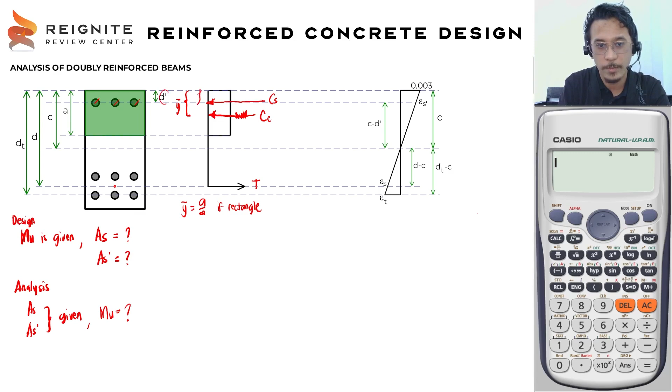And then this distance here, this is our D prime - the distance from extreme compression fiber to the centroid of compression reinforcement. Then here, same as discussed last time, the D and D sub T. The distance between CC and T is D minus Y bar, or for rectangular sections, D minus A over 2. And the distance between CS and the tension is D minus D prime.

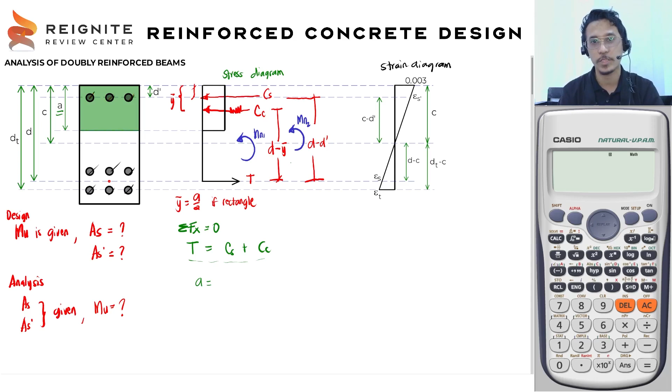So to analyze the beam, you can just get the summation of Fx in the stress diagram. Summation of Fx equals 0, so we have tension equals CS plus CC. Using this equation, you can get the value of A, which is the depth of the compression block from the extreme compression fiber, and then we can calculate the value of C.

By getting A over beta sub 1, C equals A over beta sub 1. Then the next step is to determine Fs prime and Fs, and check if our assumption is correct - since initially we assume that Fs and Fs prime yield. Then you also need to calculate the strain to check if it's under the tension control section, compression control section, or in the transition zone.

After analyzing and determining all those parameters, we can now calculate the value of Mn, or ultimate moment capacity, which comes from Mn1 plus Mn2. MN1 comes from the concrete and initial tension bars, and MN2 from the additional reinforcement in compression and tension side.

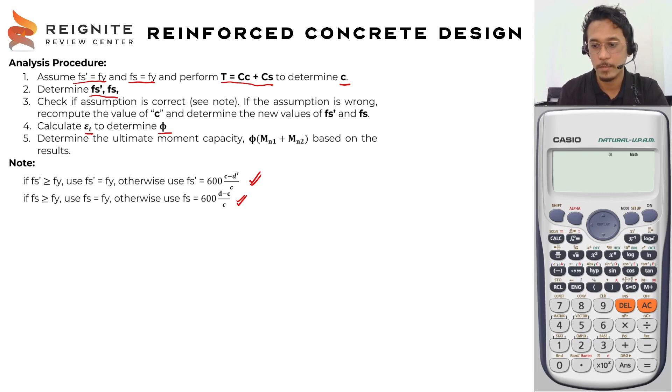Okay, so let's start this problem. Sabi sa problem, a simply supported rectangular beam has the following properties. So for the length, meron tayong 6 meters. Sa base naman ng ating width ng beam, we have 300. The effective depth of the beam is 500 mm, and yung D prime natin, o yung location nung centroid ng ating compression steel reinforcement, ay 60 from the extreme compression fiber.

Okay, so D prime yung ginagamit natin doon na symbol. So D prime is 60 mm. Yung D naman natin, yun yung distance mula sa extreme compression fiber to the centroid of tension reinforcement, which is 500. Now we have here AS natin na 25 mm diameter bars.

So walang binanggit kung ilang layer yan, so we need to assume na siya ay isang layer lang. Okay, so AS prime, 4 na 20 mm diameter bars. So we have here also yung 28-day compressive strength ng concrete natin, which is 28 megapascals, and yung steel strength natin o yung yield strength ng steel ay 276 megapascals.

So sabi sa problem, calculate the following using NSCP 2015. So neglect, ito yung term na neglect. Nabanggit ko yan kanina, so neglect the displaced concrete. Okay, ayan. So for this problem, we are required to calculate the additional nominal moment capacity provided by the added reinforcements. Ibig sabihin yung additional reinforcement.

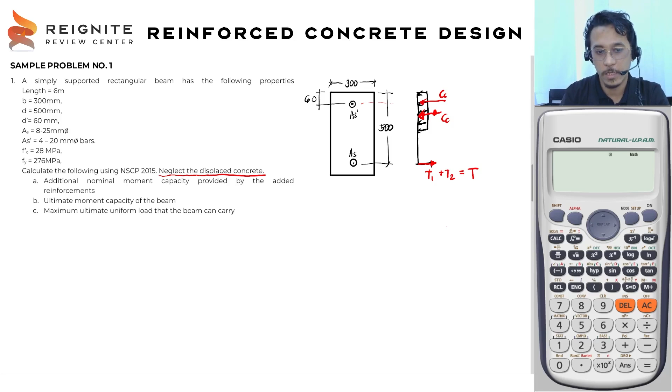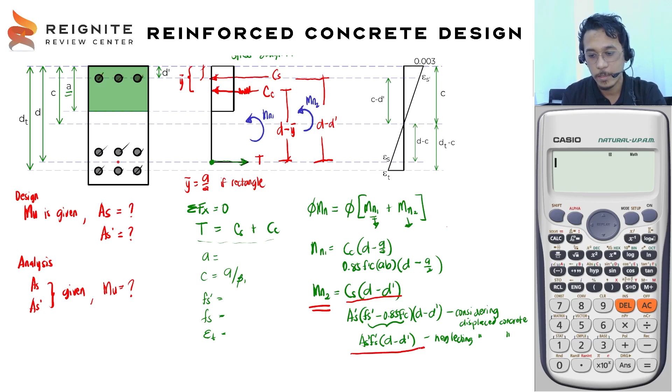Ano? So ang tinutukoy dun, class, na additional nominal moment capacity ay yung ating diniscuss kanina dito, which is yung ating Mn2, which is equal to CS times D minus D prime. So sabi sa problem, neglecting displaced concrete, ito yung kailangan nating formula later sa pagsosolve niyan. Pero before yan, we need to calculate first, o we need to follow the procedure first.

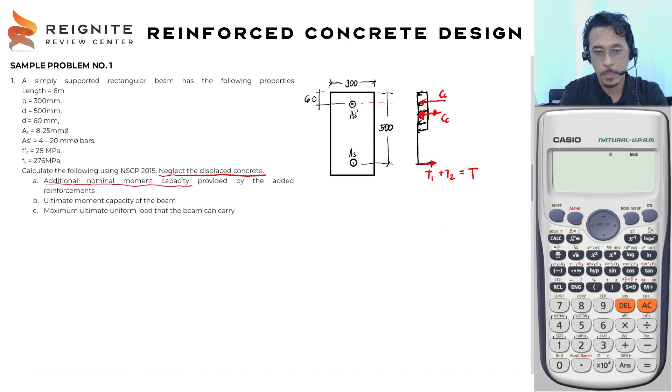So ang gagawin natin diyan, using statics lang, summation lang to ng Fx equals 0. So we have here CC plus CS equals tension. Diyan lang natin kukuhanin yung value ng A. So dito kasulat, copy ko lang to.

So yung ating CC, we need to assume muna. So lagay natin yung based dun sa kanina. Assume o assuming Fs ay equals sa Fy, and Fs prime ay equals sa Fy. So we need to prove na tama yung assumption natin, otherwise kailangan mong i-recalculate yung value ng C.

So for the concrete compressive force dito na CC, so we have here 0.85 F prime of C times yung area ng concrete natin, which is equal dun sa AB, since tayo ay nagtatry ng rectangle.

Plus yung ating CS, so AS prime times, ito ay neglecting yung displaced concrete, so dito dapat ay Fs prime. Then equate natin siya sa AS Fy. Okay, so yan yung ating gagawin na formula to calculate the value of A.

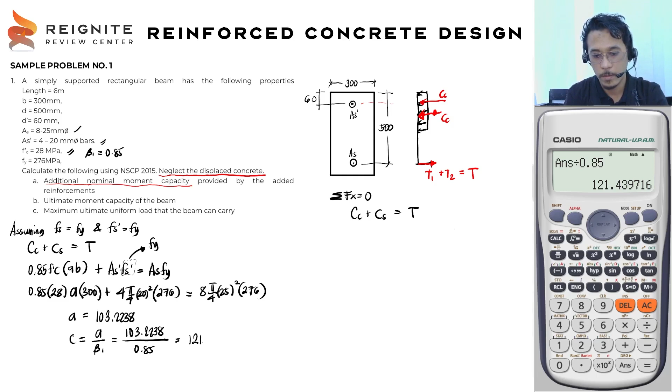Next, i-compute niyo na agad si Fs prime and Fs. Huwag niyo munang gagamitin or i-compute si strain kasi sa pahuli na siya. So gawin muna natin si Fs prime, galing dun sa strain formula natin, yun yung 600 times C minus D prime over C. So 600 times yung value ng C natin na 121, babawas natin yung D prime, which is itong 60, then divide natin siya dun sa C natin to get the value of Fs prime.

Okay, store ko lang to sa E. So we have here 303.5566. Check dito, yung Fy natin is 276, therefore ito ay mas malaki sa Fy natin. Therefore, assumption is correct.

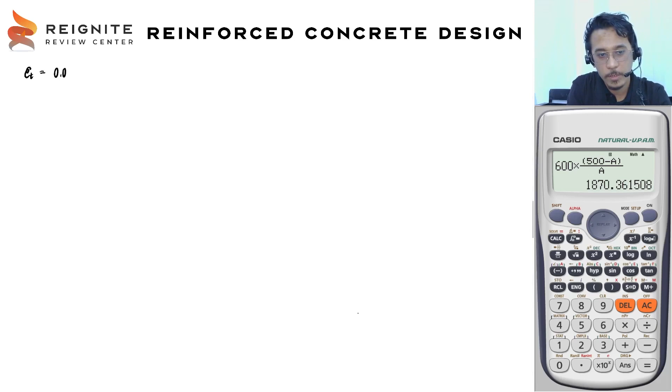So next step na natin dyan is to determine the strain, kasi kailangan natin ma-check kung siya ba ay tension controlled or not. So para ma-compute natin yung strain, we have here 0.003 times D sub T minus C, over C.

0.003, ita-times natin siya dun sa D sub T natin. So sa problem na 'to, wala tayong D sub T kasi hindi naman nabanggit kung ilang layer, so wala tayong pagkukuhanan ng D sub T. So yung D sub T na gagamitin natin ay equal na rin sa D dito sa problem na ito. So 500 minus yung C natin na 121, then divide natin siya sa 121.4397.

Yan, makukuha niyo na class yung epsilon sub T. Pag na-compute natin yan, check ko lang kung nandito. Ayan, so 0.003 times natin sa 500 minus yung sagot natin sa A, then divide natin sa A. Yung A yung ating value ng 121, check natin kung tama. Ayan, ito yun. So we have here 0.00935.

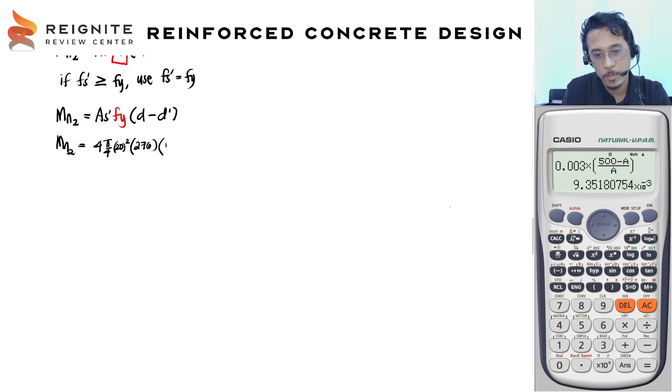So solve na natin yung Mn2. For the value of Mn2, As prime natin is, check natin yung value, kung ilang bakal to. 4 na 20, okay, so ito yung gagamitin natin. So 4 na 20 times yung Fy natin na 276. Ito yung ating As prime, ito yung ating Fy. Then ta-times natin siya sa D minus D prime, so 500 minus 60. Dito makukuha na natin yung value ng Mn2, and divide nyo ito sa 1 million.

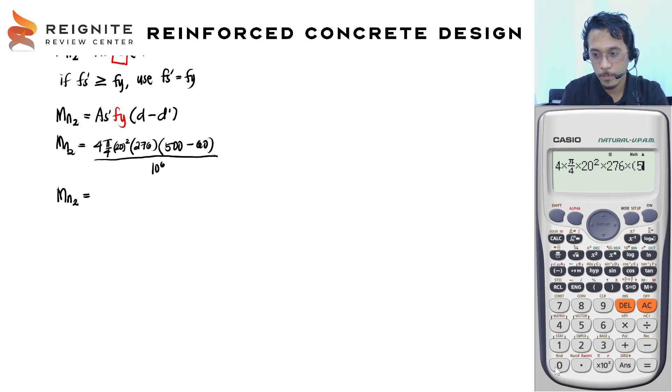So Mn2, 4 na 20. Dito makukuha nyo yung 152.606 kilonewton meter. Double check ko lang: As, then dito meron tayong Fy, then As prime pala yan. So 500 minus sa 60, then divide natin sa 1 times 10 to the 6. So ito yung sagot natin for letter A.

Now for the next problem, calculate the ultimate moment capacity of the beam. So we need to get the value of Mn1. Okay, so for Mn1,

ito yung sa 0.85 F prime of C, AB times sa D minus sa A over 2. So guys, take note, pag kuha kayo ng ultimate moment capacity, kailangan i-consider nyo na yung magma-moment kayo sa centroid ng reinforcement sa ilalim. Dito na kayo mag-moment, para makuha nyo yung Mn1 dyan, para consistent.

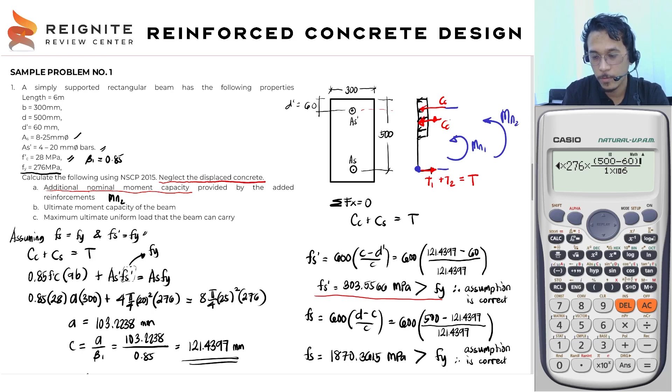Tapos yung moment dun sa kabila, yung Mn2, yung para dito tsaka dito. Okay, so yun yung pinakamadaling way, para common point yung ating papagkuhanan ng bending moment. Kasi pag ang ginawa nyo ay yung tension 2, baka ito ang gamitin nyo, so kukunin mo pa yung As2, so hassle yun.

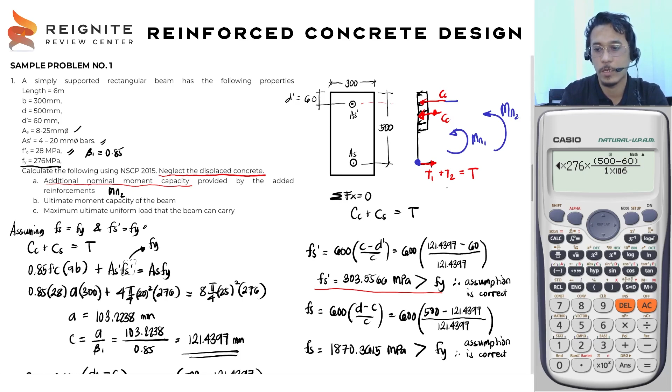Okay, so for this one, kunin lang natin dito yung values. So 0.85, F prime of C natin is 28. Then for our value of A, kunin ko lang siya dito, itong 103.2238, yan yung ating value ng A na na-compute kanina. Then for our B, ito ay 300. Then D natin is 500 minus yung ating 103.2238, divide natin siya sa 2.

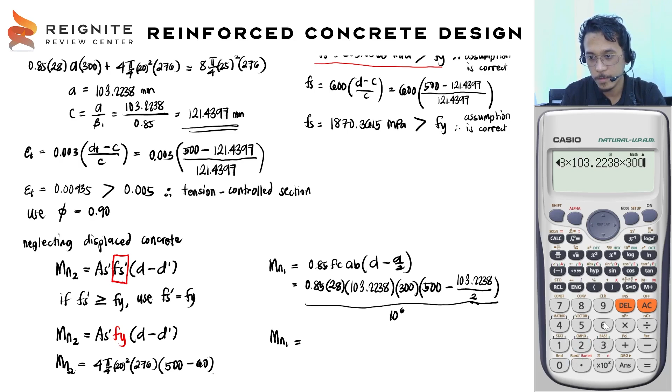Then all over 10 to the 6 na lang, or 1 million. So for our value of Mn1, palagay lang natin yan sa calculator. So 0.85 times 28, times natin sa 103.2238 times 300, times natin sa 500 minus sa 103.2238, divided by 2. Divide natin sa 1 million. Makukuha nyo na dito class yung 330.47. So Mn1 pa lang yan.

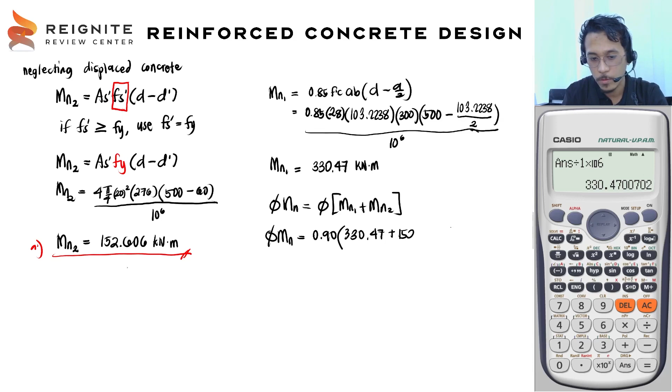Now to calculate the ultimate moment capacity, kailangan yung phi Mn, which is equal dun sa phi times sa Mn1 plus Mn2. So add lang natin. So phi Mn ay equal sa 0.9 times yung Mn1 natin kanina, 330.47, then add natin yung 152.606. Yan, so for our phi Mn, makukuha nyo dito class yung sagot natin.

So add ko lang tong 152.606, then times natin sa 0.9. So we have here 434.768 kilonewton meter, and yan na yung sagot natin for letter B.

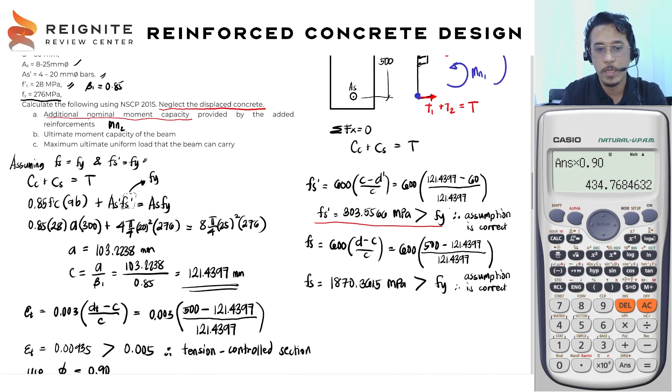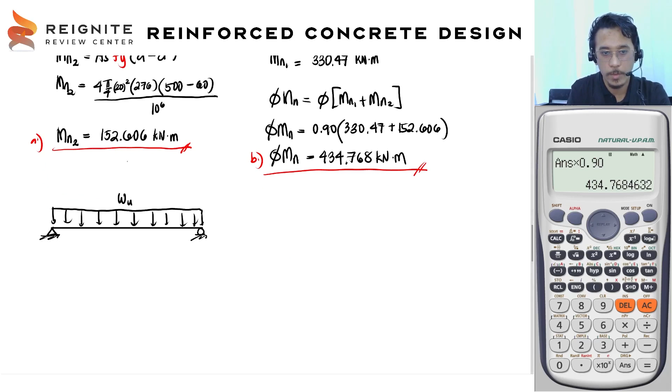Now for the last problem, ang tinatanong na dito is maximum ultimate uniform load that the beam can carry. Therefore, drawing natin yung beam para mas maintindihan nyo. So let's say ito yung beam natin, ito yung ating supports. Yung beam daw magdadala daw ng uniform load, at gusto natin makuha yung maximum na uniform load na kaya niyang dalhin, maximum ultimate uniform load. So para malaman natin yon, you need to determine first ano yung maximum bending moment dito sa beam na to.

Kasi nandun yung critical, nandun yung maximum natin na pwedeng ilagay. Doon natin i-equate yung φMn natin, doon manggagaling yung MU natin. So natutunan natin nung structural theory at saka kahit pala nung strength of materials na yung maximum moment ay nandito sa pinaka gitna nung span. So if this is 6 meters, diba, yung MU max natin is WU L squared over 8.

So yan yung i-equate natin dito sa φMn. Okay, so for letter C, MU ay equal sa φMn. Okay, so MU natin, yun yung ating MU max, which is equal to WU L squared over 8. Then equate natin dun sa value ng φMn na 434.768. Okay, so WU times 6 squared over 8, equate natin dito.

So makuha natin yung value ng WU, ito yung maximum na WU na pwede nating gamitin. So 434.768. Yan, so we have here 96.6151. Double check ko lang, so 434.768 times natin sa 8, divide natin sa 6 squared. So here we have 96.6151 kilonewton per meter. So ito yung maximum natin na load na pwedeng ilagay para kayanin nung beam natin.